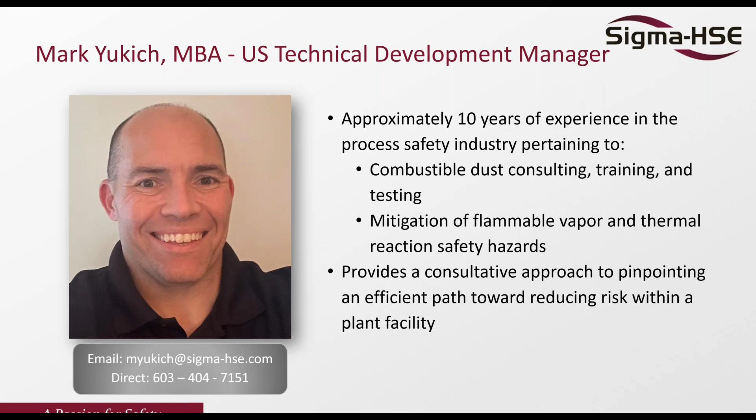We provide actionable risk assessments and testing solutions so you can focus on what really matters: protection for your people, business, workplace, and environment. In this webinar, we will discuss the Hazard and Operability Study, HAZOP, and Layer of Protection Analysis, LOPA. We will cover key elements of HAZOP-LOPA and learn why the LOPA methodology excels at assessing the likelihood of various risk scenarios. We will have time for Q&A at the end of the session. Feel free to add questions to the questions section during the training, and we will address those at the end of the program. Doug Gruter will be our process safety consultant leading our discussion today.

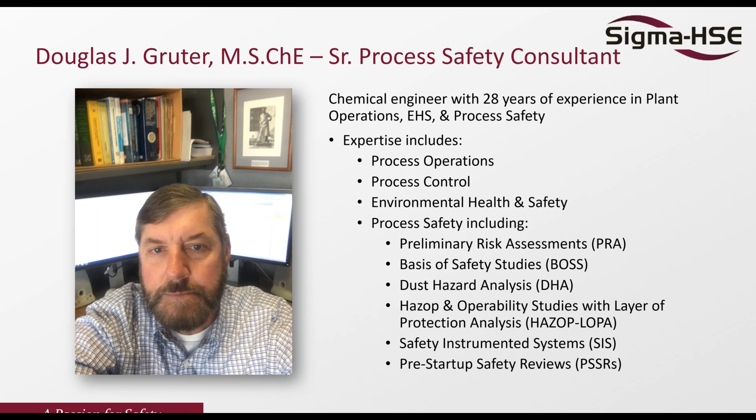The purpose of this presentation is to give you an overview of HAZOP-LOPA and explain to you how we get to the likelihood using LOPA and the purpose of it.

As in any PHA study, the purpose is to identify and mitigate risks. Then what we need to do is highlight those risks to management and the operators and get them into a risk action plan for the site so that they can be prioritized based on all the other demands that are on a site and taken care of in a timely manner.

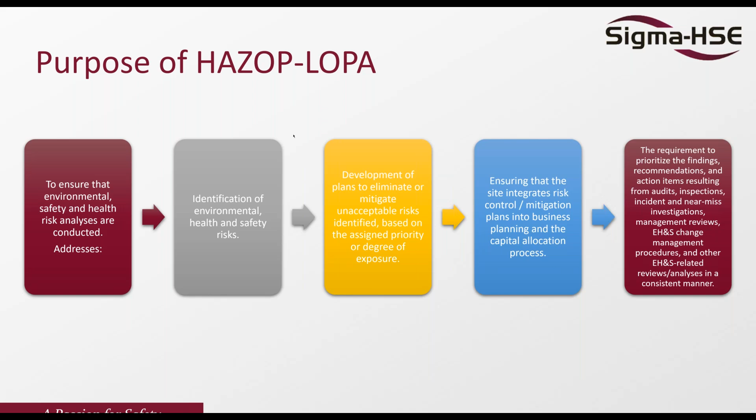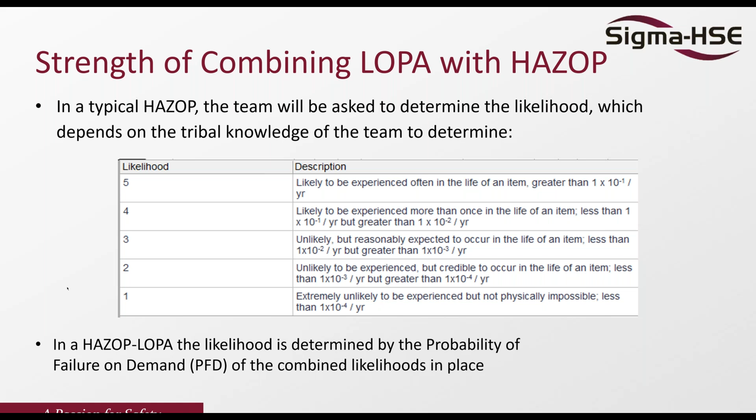First, as I said, there are two parts to a HAZOP-LOPA: what to do before the team meets and what to do during the team meetings. The very first thing that the facilitator should do is pull together a team. You must have at least an operator familiar with the process, a technical person familiar with the process, and a maintenance person. You should also have an EHS representative.

Another thing you have to do is collect process safety information, and this is very important. So you certainly want to have P&IDs so that you can determine the nodes that you'll be going through. You want to know your control system and any interlocks that are available, as those will be used as safeguards, and your equipment specification and operating conditions.

Operating conditions, both safe upper and lower boundaries, are important to have going into the HAZOP, because you're going to use these during the team meetings to develop credible scenarios using guide words such as more, less, flow, and pressure. You need the safe operating limits to know when you're falling into a more flow or less flow situation.

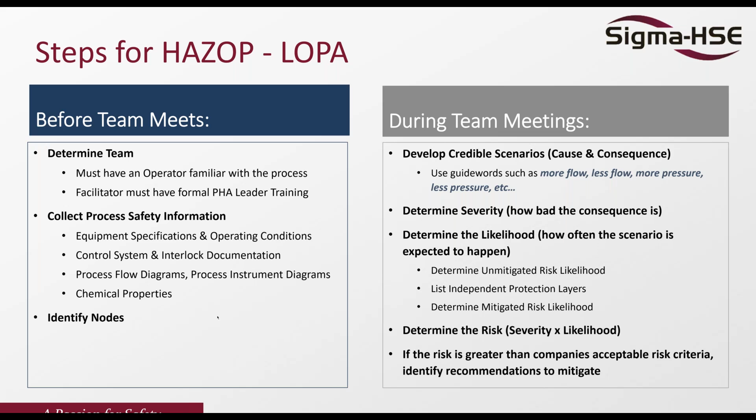Next, I'm going to talk a little about the material in the form of an example. Our example here is a binary distillation column of alcohol and water.

Alcohol will come off the top of the column and the water will come out the bottoms. In this scenario, the overhead valves are closed and the bottoms flow cannot keep up with the material coming in. This results in the safety devices, the pressure safety valves, being flooded.

The consequence of the flooding and overpressure of the column results in the column failing, releasing alcohol vapors, and resulting in a vapor cloud explosion and multiple fatalities.

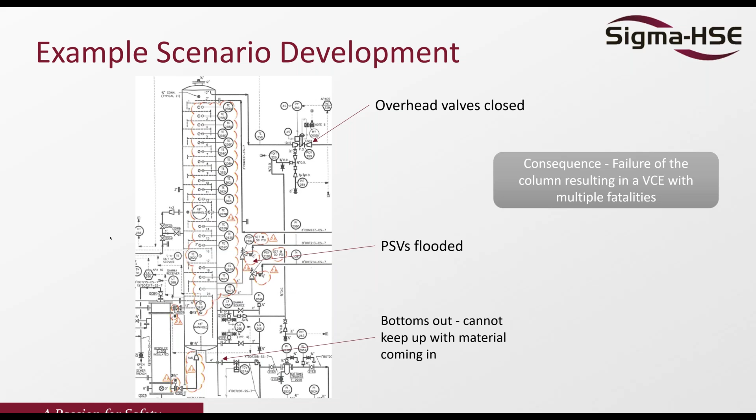Using this example, the first thing we're going to do is develop the scenario. The deviation is high pressure in normal operation. The cause is no vapor flow out of the top of the column due to the manual block valves being closed. The consequence is that the pressure in the column exceeds the MAWP of 75 psi.

The column ruptures, releasing alcohol vapor, which finds an ignition source, resulting in a vapor cloud explosion. So to go over this, the cause is the event that starts the scenario, and the consequence is the result of that happening.

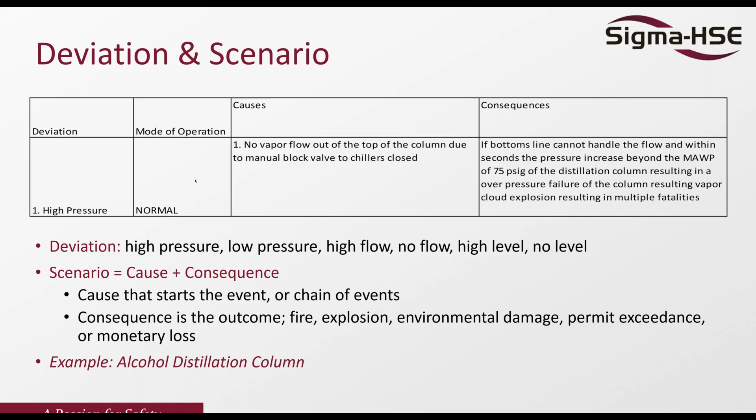Next, we'll go into determining the severity, which is the next step. The severity is the outcome of the event. And we have to remember here that we're not adding any layers of protection.

Often during a HAZOP, you'll hear participants say that really cannot happen because we have this or that interlock or this safety, or the operators know better. Well, those are layers of protection and will be taken into account when determining the unmitigated and the mitigated risk likelihoods. Right now, we're just going with the pure severity without any layers of protection. And the severity can be an injury, environmental insult, or monetary.

So here you see the consequence category is an injury with a severity of 6, which is a multiple fatality.

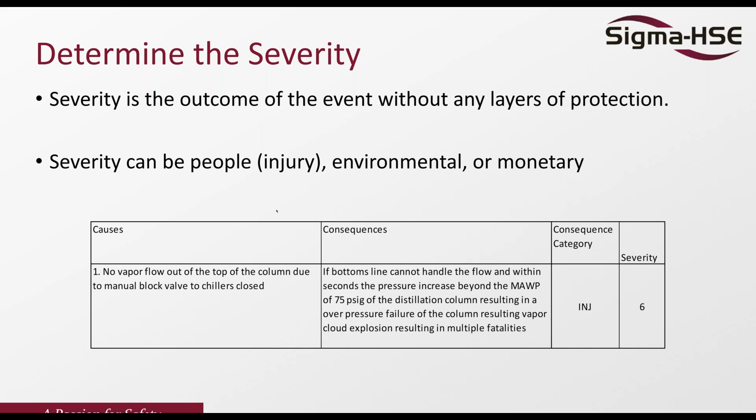So next, what we're going to do is take into account the likelihood of the event occurring. As said previously, the LOPA methodology uses the combined probability of failure on demand to determine the likelihood.

Doing that, you'll determine an unmitigated risk likelihood using the initiating cause, any propagating or enabling causes, and the conditional modifiers of probability of ignition and worker present. Then we'll determine the mitigated risk likelihood, where we'll take credit for our layers of protection. Combining the two, we will come out with a final likelihood for the event being studied.

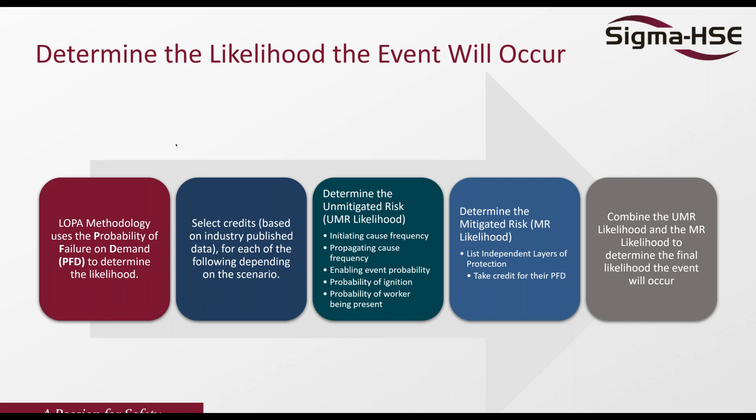Going into each of these in a little more detail, the initiating cause, the deficiency that started the scenario, could be human error, an instrument or equipment malfunction, a leak, or external events.

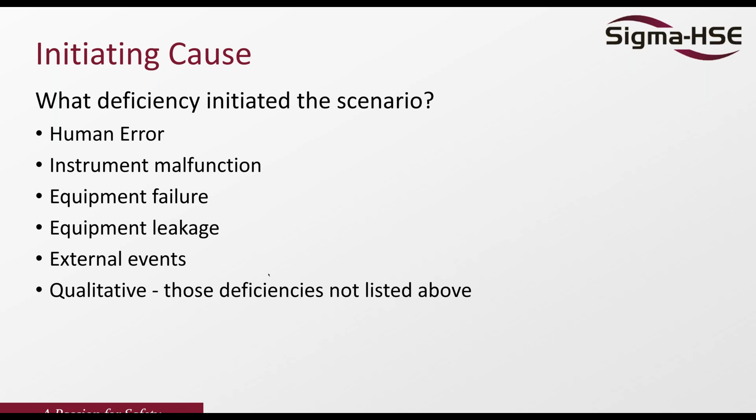Next, we'll talk a little bit about propagating cause. The propagating cause is an event that must occur in addition to the initiating event for the scenario to take place. And here, we have to be careful to avoid double jeopardy.

The following guidelines are what should be used. Two concurrent human failures is credible. A single equipment failure with a human failure is credible. But the simultaneous failure of two or more independent pieces of equipment may not be credible. An equipment failure or human failure in combination with an external event may not be credible. And the simultaneous occurrence of two or more independent external events is not credible.

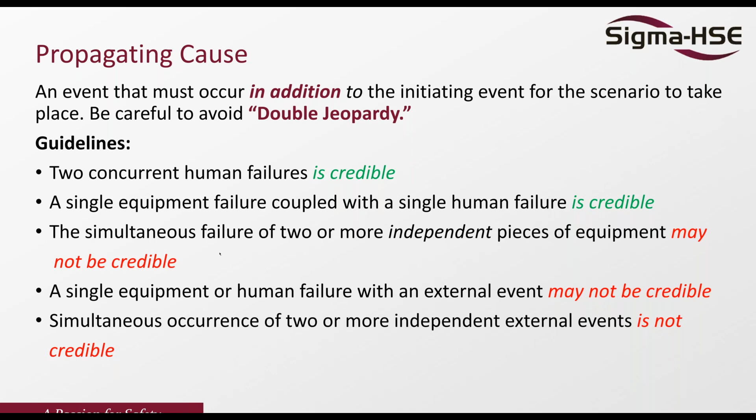So keeping that in mind, the next unmitigated risk analysis component is the enabling event. And the enabling event is something that helps the scenario to move along, but only happens in a certain percentage of time during the operation.

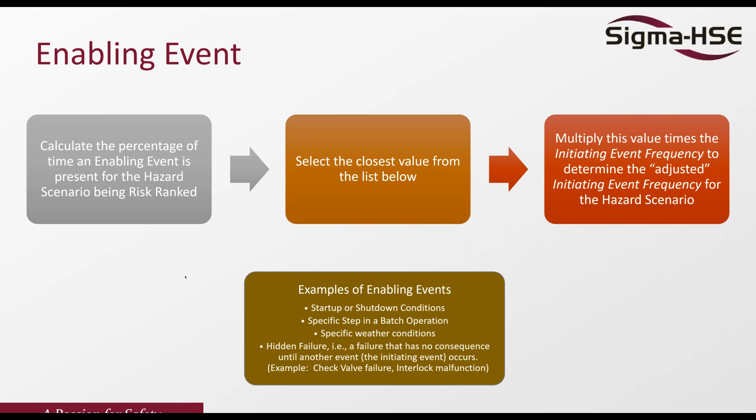Now we go on to some conditional modifiers, the probability of ignition. In our scenario, the alcohol vapor finds an ignition source. So the definition for probability of ignition includes two probabilities: the probability that an ignitable mixture is created, and the probability that the ignition source has sufficient energy.

Some things that should not be taken into consideration during determining the probability of ignition would be secondary containment to limit the spread of liquid, drainage, your classified area and the equipment within it, and bonding and grounding. These will be considered under the safeguards in the mitigated risk probability section.

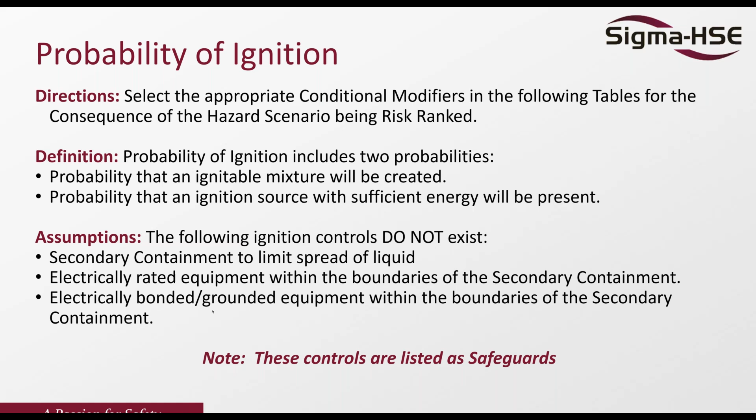Probability of worker being present. If you're going to have an injury, there has to be a worker present for that to happen. Typically called probability of presence on demand. And there are a number of guidelines around this conditional modifier.

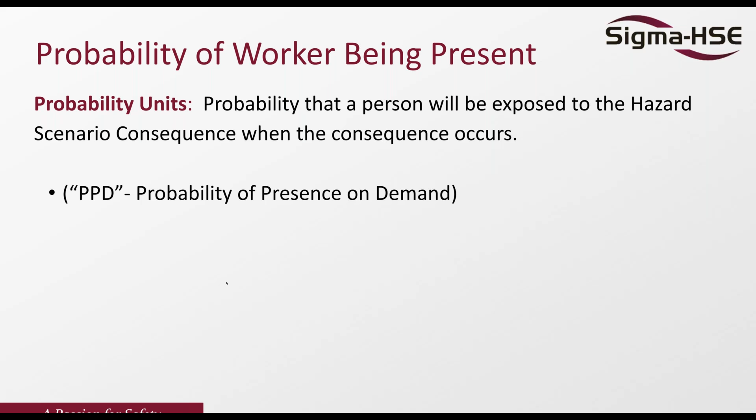So to summarize, the unmitigated risk likelihood has to do with the probability of a human error occurring, a propagating cause, if any, and an enabling event with the probability of ignition and a worker present.

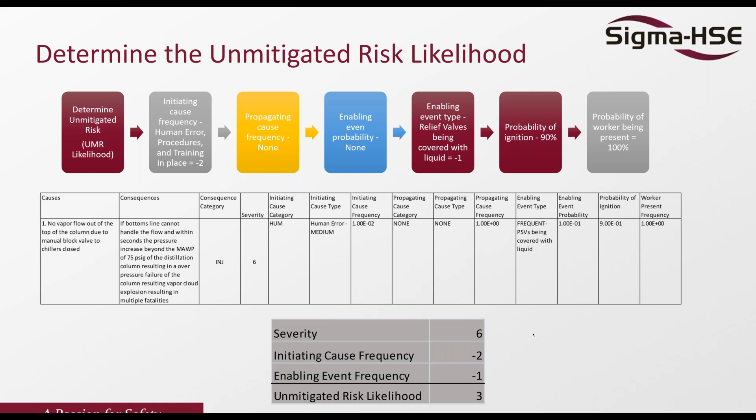Now we're going to move on to mitigated risk and safeguards. But before we do that, we should review what an independent layer of protection is, because any safeguard has to be independent from any other safeguard. And that means that there are no common cause failures.

So a layer of protection should be included in the mechanical integrity program and have a preventive maintenance procedure. If it does not, you cannot take credit for it, but should write a recommendation to include the IPL in the MI program and have a maintenance procedure to address it.

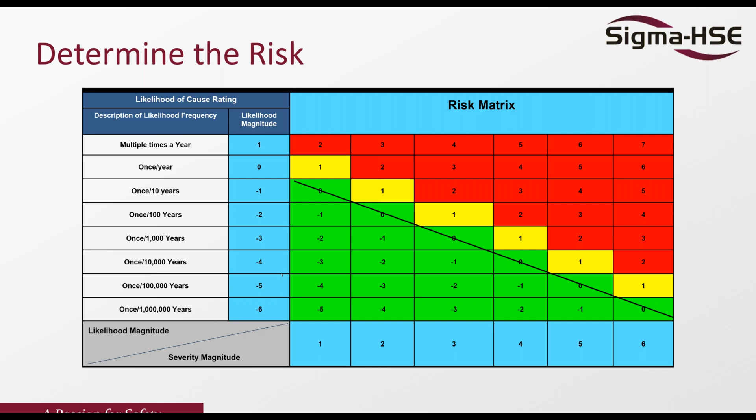As I said, the company's risk criteria will also determine how quickly the recommendation should be implemented. We can have a high risk ranking, which in this example is greater than or equal to 2, a medium, which is 1, and a lot of times a medium can be deemed to be all right if it's as low as reasonably practicable, or ALARP.

Anything below a 0 is acceptable usually, and those things can usually be done fairly quickly.

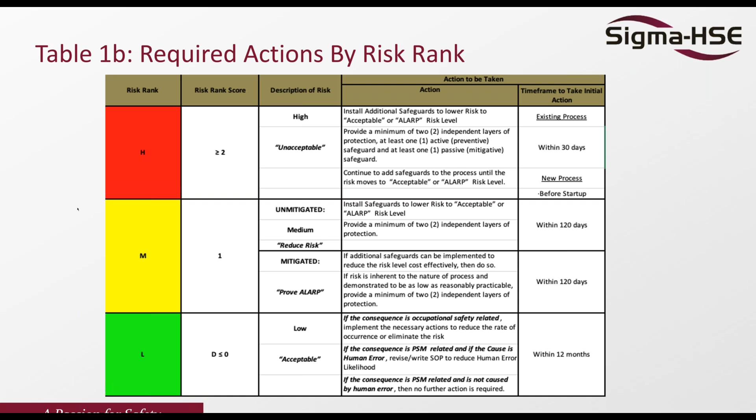So your recommendations, if the risk is above the company's risk criteria, then we have to make recommendations to reduce the risk. And the actions should be put into the plant action database so they can be prioritized as to severity and mitigated according to the company's capital project funding. A lot of these recommendations will take capital expenditures. It's up to the facilitator and the team in a company to highlight the importance of getting these things done.

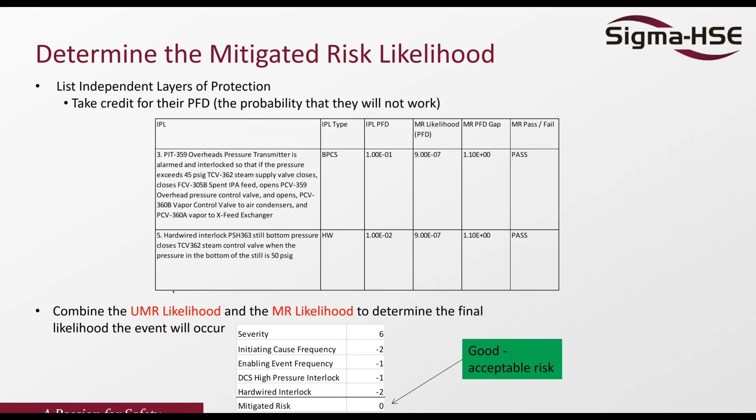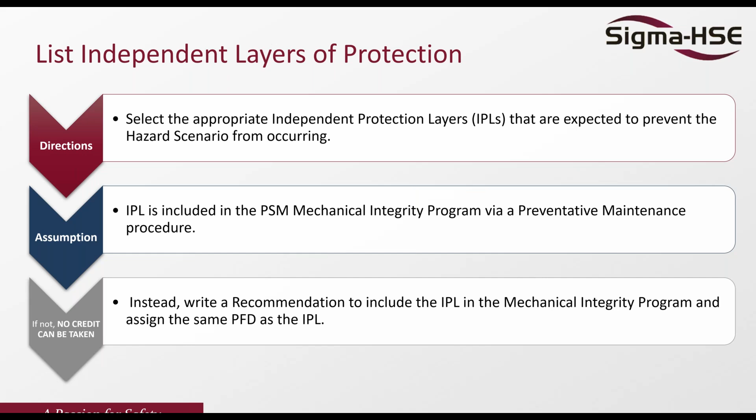So Doug, can you expand more or provide any examples of what would be considered tribal knowledge? Tribal knowledge is usually undocumented knowledge that a number of people in the operating facility will have. People know about it, it's not documented, but they may know how to go about fixing it on the fly in the plant. So it's a collective group of knowledge that's usually undocumented, and a relatively small group of people know about.

Okay, thanks Doug. Another question here is, how do you decide when to stop at a HAZOP analysis versus progressing into a LOPA? So what specifically triggers indicate that further risk quantification is necessary?

That all gets answered by the company's risk criteria. Some companies will LOPA anything above a severity 3. Some companies will LOPA everything to reduce the risk as much as possible. If you don't LOPA things below a 3, you will be stuck at a risk ranking of 2, and that may not be acceptable to the company. So it all goes back to the company's risk criteria.